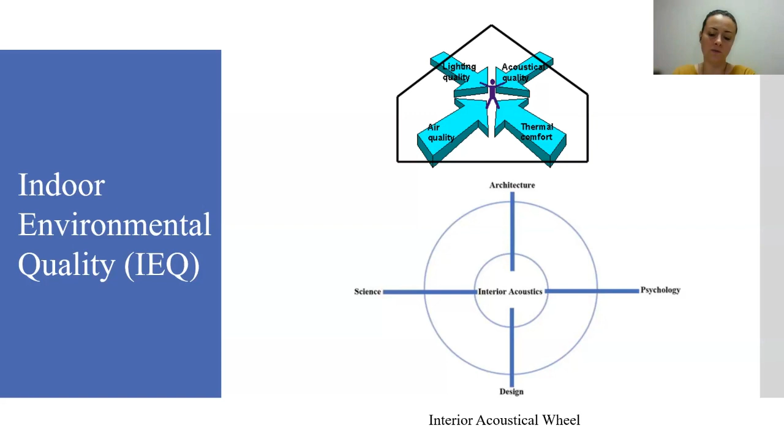And the acoustic quality, which is really important, but generally it's treated like the less important part of indoor environmental quality, but it's not actually. So in the acoustic wheel, interior acoustics deals with architecture, psychology, science, and design, because your design affects the acoustic comfort of a space, which affects the psychology of your users. So you need to know how the sound behaves in a room.

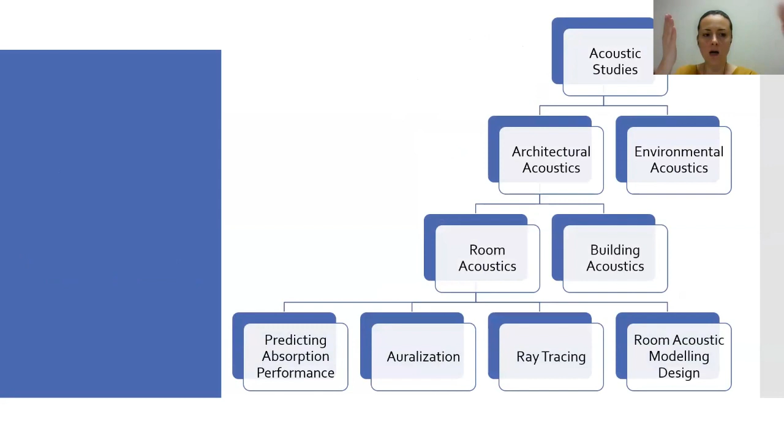So acoustic studies generally divide into two: architectural acoustics and environmental acoustics. Since we are architects and interior architects, we deal with architectural acoustics. And like 99.9% of the studies are room acoustic and building acoustic studies.

When we say room acoustics, it's mostly the volumetric acoustics we deal with. This is the part interior architects deal with more, because when you're trying to increase comfort parameters, you need to know the room acoustics. When we say building acoustics, it's more like the urban noises, or the building's whole sounds. If you're working with the whole building sounds or the building and urban relationship, then you need to work with building acoustics. At the bottom you can see four different techniques.

Okay, we do those studies, but how do we do them? There are some methods. The first, the most used one, is auralization and ray tracing. Those are the more popular ones. And of course, room acoustic modeling design is also popular these days because we have some software, and predicting absorption performance of the space is also becoming popular. But generally, we are doing ray tracing methods in buildings. I will briefly explain what they are to you.

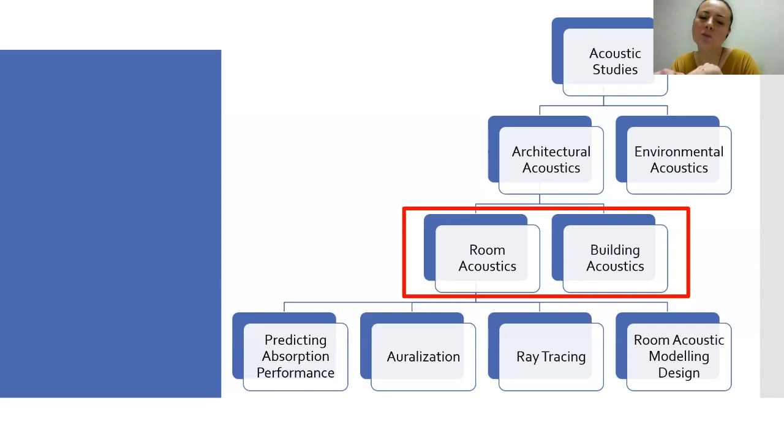Predicting absorption performance of spaces is mostly a method we do in laboratories, where we have special rooms called reverberation rooms, and we can predict how a material behaves in a room, how it absorbs sound. Also in Izmir there's one laboratory like that. If you had taken my course, you would see that laboratory. Room acoustic modeling design is more like, as I said, Odeon, which you will see in some images.

So when we say architectural acoustics, it's the science of noise control within buildings. It includes room acoustics and building acoustics, as I said. The first application of architectural acoustics was in the design of opera houses, then concert halls. First, everything started with analyzing opera houses, spaces for music, and then spaces for communication also. They thought, oh, this is important too, and many studies started to happen in those spaces.

More widely, noise suppression is critical in the design of multi-unit dwellings and business premises that generate significant noise. If you want to study in that field, you can study concert halls, auditoriums, churches, conference rooms, theaters, cinemas, music rooms—any space that a human being can live in, can be in. So you need to think about their aural comfort, like office spaces, your classroom, your home, anywhere that you communicate with someone and there's a space.

So room acoustics is the science of controlling a room's surfaces based on sound absorption and reflection. This is important because, as I said, we deal with sound, and the sound can be absorbed in some spaces and reflected in other spaces. For example, my desk here, probably all of your desks are plywood or some wood with a covering on it, right? It can be shiny or massive wood, whatever, but if it's shiny, we can say it's nicely reflective—or a mirror.

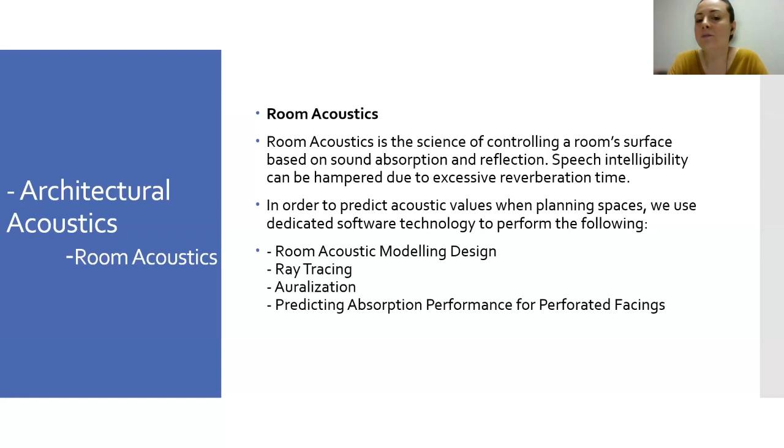There are some parameters I don't want to mention all of them here, but for example, reverberation time - what will be the reverberation time of this space. In those models, we can predict them.

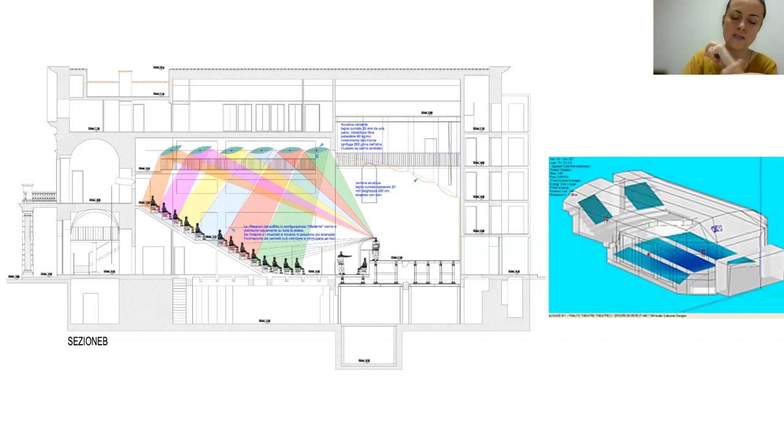On the left-hand side, you can see the ray tracing method. Here there's a speaker on the stage and audiences. With ray tracing, you draw some rays coming out of the mouth and reaching the receivers. You can see how the reflectors on top of the audiences behave.

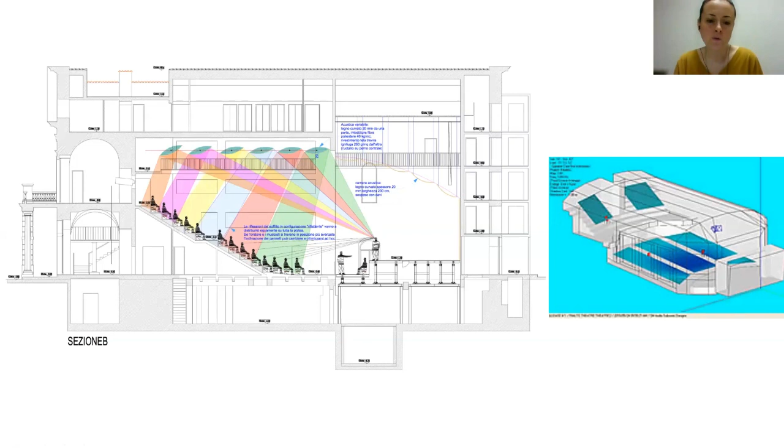If they are reflective, you can see which ray is coming to which part of the audience. For example, when we look at the green part, you can see the first reflector is working for the first 4 rows in that hall. If you tilt the first reflector, you can see that the reflection would go to different parts. So the location and angle of each surface material is very important for us.

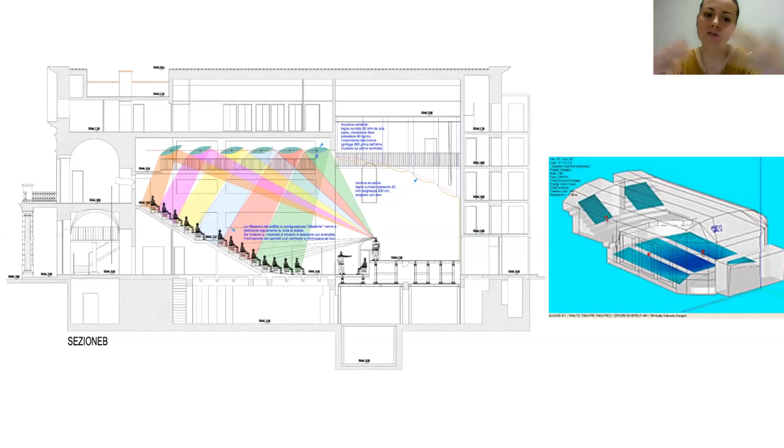This is just an example from a ceiling, but you need to think about the rear walls and the side walls too.

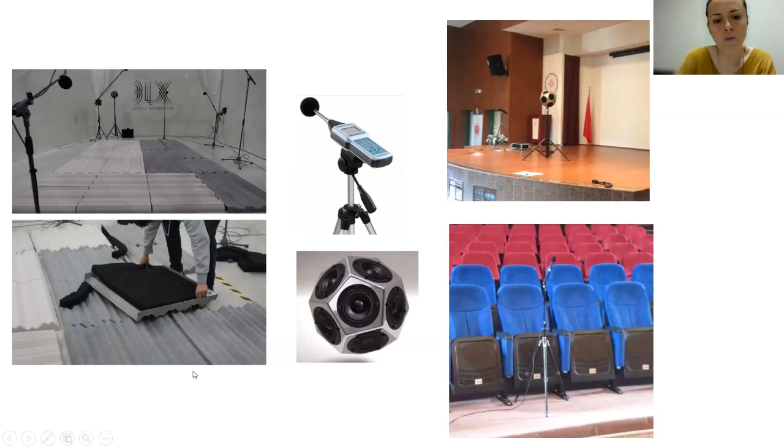So this is the method that we do. And on the right-hand side, you can see those are the auralizations.

So in a space - these are also my images - you can see we locate the speaker on the stage, we give sound to the room, and we auralize what would happen in that space. We have a microphone at the bottom image you will see. You locate the microphone in different settings, and you can see how that person hears each frequency.

So when we say noise control, it's more dealing with controlling the space that the noise is emerged. You need to eliminate the noise source at the beginning, first of all. Then, if you can't, you need to switch it with a quieter one. For example, you're living in a building and there's a huge UPS.

Machine right next to your door, think of it like a generator. First of all, what you need to do is replace that machine if we can, of course, with a quieter one. And then if we can't, we need to know how that sound is produced. We have some different methods in acoustics.

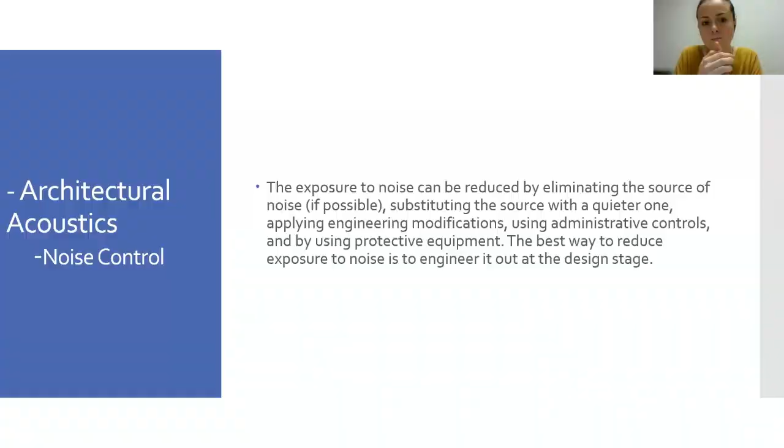For noise, we need to know what is the noise source first, and second, we need to know is it coming from structural borne sound or air borne sound. And for noise control, it's more dealing with urban areas and buildings. First we need to know which sound we can control under noise control. First, if it's industrial noise.

If you're building -- I know there are architects in the studio -- first of all you need to reach the noise map of your location. First of all, you need to know where the main noise sources are around your building. There are some maps you can see, with different colors.

Here you see on the right hand side the CADNA software. In CADNA you can see which building is producing more sound. And for example, if you are constructing a building, you need to know the noisier parts, and locate your volumes according to that.

So you need to know, is there road traffic noise, is it aircraft noise, or is it train noise, is it subway noise? You need to know all of them before starting to design.

And here you can see on the right hand side an image which looks like a huge thermometer. This is our sound recording machine. We carry it everywhere, and we can measure the loudness of spaces, the loudness of an area.

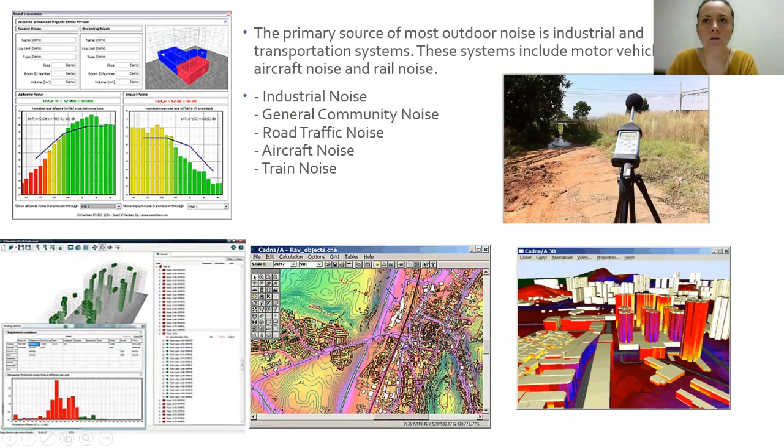And also, I'm sure some of you might have it, with your cell phones you can download some programs, and you can measure the background noise or the loudness level of many spaces.

So with acoustic materials, as I said, both in room acoustics and noise control, you need to know first the noise source, and then you need to know the acoustic materials, you need to be familiar with them. First of all, you need to know which one is reflective, absorptive, or a diffuser, and then you need to know where to locate which one.

So acoustic materials can be absorptive, reflective, or diffuser. I also mentioned a little bit what is absorptive and reflective. Diffuser diffuses the sound in different angles. And the material quality determines whether it's reflective, absorptive, or diffuser. As I said, your tables or most of the walls or glass or mirrors are all reflective.

For a diffuser, it should have different angles on it, you will see some examples. They all have different physical features to control the sound. We need all of them in a space. You cannot just use one of them in a space and reach speech intelligibility.

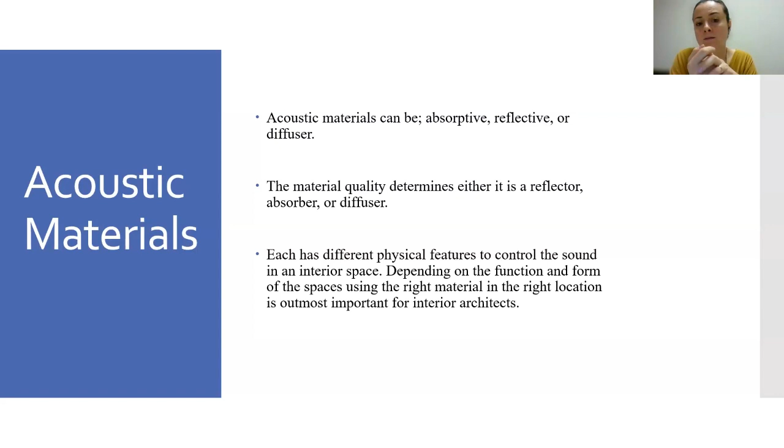You need to know 3 of them and need to know where to use them. Here, the reflector: if you had physics in high school, maybe you studied mirrors. You need to know the reflection. It comes with the same angle and it goes with the same angle. Those 2 angles are the same.

In absorption, let's say you have 100 sound rays. In a reflection, you reflect almost all of them back into the space. In absorption, for example, you say that half of it is absorbed. In diffusion, it diffuses all of them, but in different directions, at different angles.

So reflective materials are located mostly on top of the, not noise source, the speaker. Those are different. When we say noise source, it means that we don't want it, because the main difference between noise and sound is that noise is an unwanted sound. So here the piano is something that you want to hear. So it's a sound, it's a source for us.

Since the sound is generated on the stage, you want to make sure that each person in that auditorium, in that hall, can hear the piano sound at an equal intelligibility level. To reach that, you need to reflect the sound as fast and as much as possible to each seat. So you see different rows of reflectors with different angles, which, in one of the images I showed you, all focus on different locations.

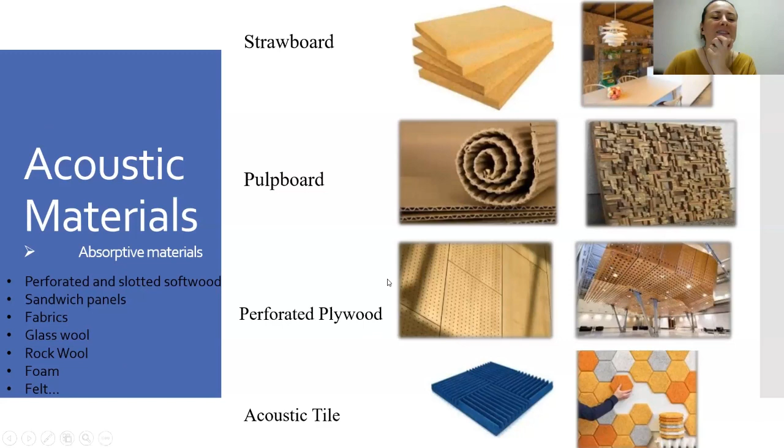And other than that, felt is a very good absorptive material, by the way, or fabrics, like even your clothes, even your body in a space; you become an absorptive material in those spaces. Diffusers, as I said, have different angles, different shapes, which means that the sound ray hits them and diffuses, goes to different angles. First of all, you need to choose one design, and then you can use it in spaces where you want to diffuse the sound.

In order to decide where to use them, you need to have a 3D model in software, like Odeon or different programs. You need to see how the sound would behave, and then you need to locate, okay, let's put some diffusers at that wall. You will see how the sound will behave. If you think that it's too much, you need to decrease the number of diffusers. And of course, to decide, you need to have some quantitative data in front of you.

You need to see, for example, if you put 10 diffuser panels, what happens to the reverberation time? If you put 20, if you put 2, what happens? You need to compare them and select according to that. For example, here are some images that maybe we can discuss. We can see some different materials, like on the ceiling in the first image. It's a perforated plywood, by the way.

It has absorptive materials behind it, because when you're in a space and you start to talk, your sound tries to hit a surface to transfer to heat. That's what actually happens. The sound energy transfers to heat energy as the sound travels. Generally, according to the direction of your mouth, the sound goes to the ceiling, hits the ceiling, and then reflects back. Whether it reflects back or is absorbed, it then reaches the receivers. This is an indirect path of sound.

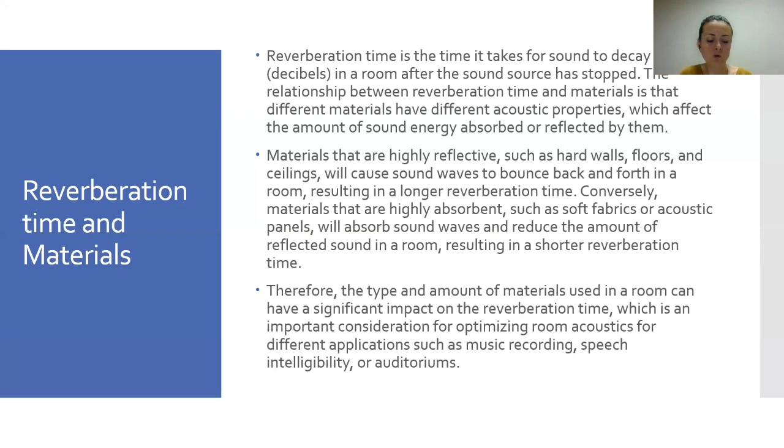So, reverberation time and materials, because in my presentation I'm sure I have mentioned reverberation time many times. I want to explain what reverberation time is with two slides, and maybe you can understand what I'm talking about when I say it. As you know, materials can be reflective, absorptive, or diffusers. So in order to use them, you need to know the reverberation time of a space. And by knowing the reverberation time, you need to know which material to use, and how much of it on which walls, on which parts of the space.

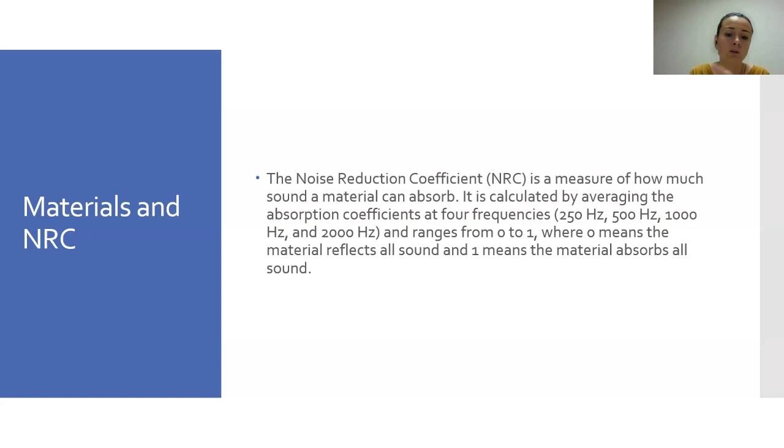If the carpet is fluffy, like 3 or 4 centimeters, daha böyle pamuksu, kalın, it can behave as an absorptive material in a space. But if it's just a very flat, thin carpet, it behaves as a reflective material in a space.

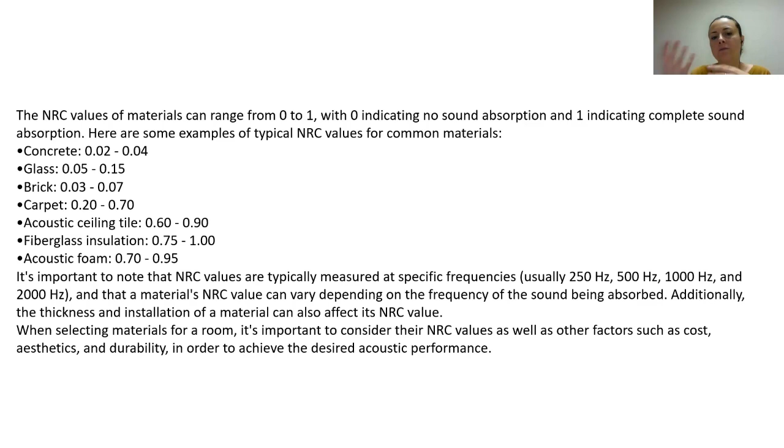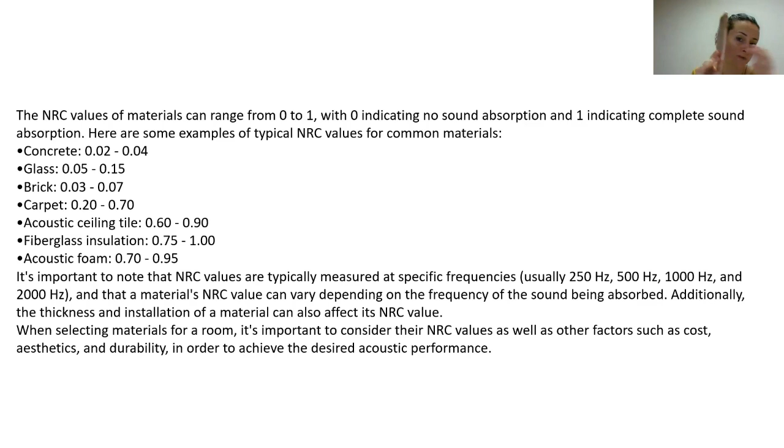For that value, as I mentioned, there are different frequencies in sound. In laboratories, they send different sounds to the material. For example, here is a piece of carpet, and I'm taking a measurement on it. First, I send 250 hertz to that material. Then we send 500 hertz, then 1000, 2000. And then they take an average of it. Here are the averages of 250, 500, 1000 and 2000 hertz.

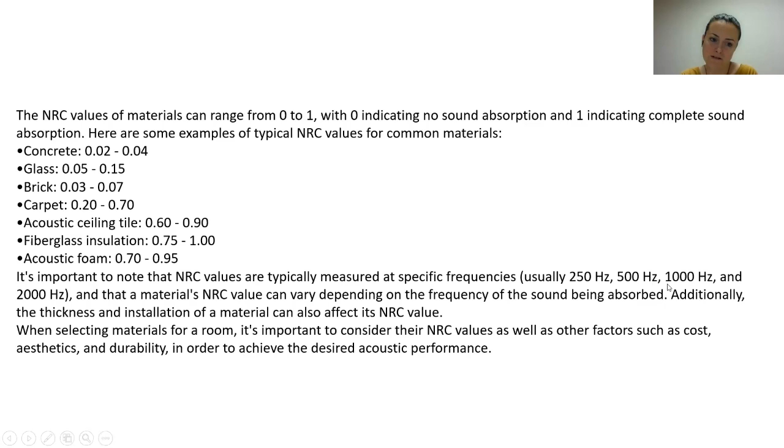So again, we are coming back to reverberation time. Do you remember I mentioned the Turkish bath, Türk hamamı, where your sound would reflect back a lot and have an echo in that space? Türk hamamında ses geri geliyordu. So in that space, we can say the reverberation time is high. But when you're in your bed covered with a blanket, and you shout or clap your hands, since the reverberation time is low, your sound would decay faster.

But in a Turkish bath, for example, you clap your hands or start to sing, your sound would hit a surface but couldn't transfer its energy to heat. It would be reflected to another surface, and from that surface to the ceiling, maybe from the floor, from the ceiling. It would go like that. In your living room or bedroom, it will maybe bounce 2 or 3 times. But in a Turkish bath, maybe just one sound ray will bounce like 100 times.

We don't know. It depends on the volume of your clapping, whatever. So for reverberation time, we define it with RT60, RT60 here you see. So think that you open a source in a space, you open the radio. Okay, actually we use white noise, but I want to make it easier for you. You open the source, you are listening to a sound. It reaches, let's say, 100 decibels.

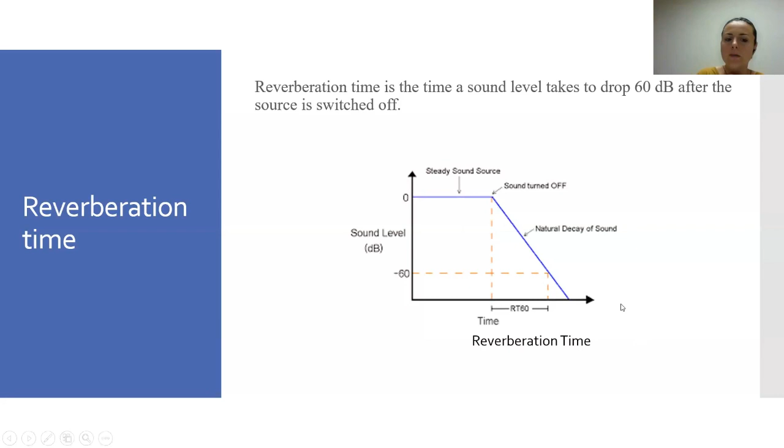Here in that graphic, you can see it also. This is important. I'm mentioning it a lot because I will use it a lot. So the reverberation times, as I said, differ for different spaces. If you're designing a space for speech, you need to have a lower reverberation time, because think that you're trying to give a lecture in a Turkish bath. It would be very difficult. There will be a lot of echo and people wouldn't understand you.

But in spaces for music, we can have higher reverberation times, like 2.5 seconds or even 3 seconds, which means that if you clap your hand in a space for music, the sound would reflect off different surfaces for 3 seconds, okay? But for speech, since the communication should be very satisfactory and the intelligibility level should be higher in a conference room, the reverberation time would be really low, for example 0.5, which is very good for a classroom.

But there are also some spaces that have both functions, like a school hall. In your school hall, one day Fazıl Say comes and plays the piano, and the second day someone gives a seminar, maybe me. So it should be suitable for two functions, right? So those spaces should be maybe around 1.5 seconds reverberation time. It differs. So here's a nice chart. You can see for speech lower, for music higher, okay?

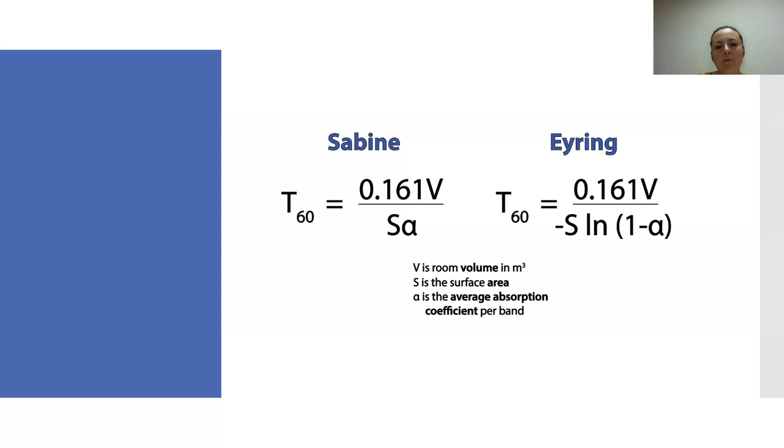So for each space, you can use that formula. Even in your room right now, you can calculate the reverberation time by using the Sabine formula, which is roughly okay. It is very difficult to use it in huge halls, but in small spaces like your rooms it works very nicely. And there's also Eyring, which was developed many years after Sabine. It has a different perspective on reverberation time, but the Sabine formula is the most commonly used one.

So for calculating the reverberation time, in that slide you see the constant times volume divided by S alpha. For that S alpha, this is how we calculate it. For example, in your space, you have 4 walls, a ceiling and a floor, and you are using different materials. First of all, you need to know the NRC value of those materials. In Google, you can type NRC value of concrete. You can see it in each frequency.

NRC value of a plywood, like curtains, carpets, or NRC value of wall constructions, like the wall layers, you can find them for each frequency, as I said. You need to know, first of all, the finishing materials' NRC values. And then if you put them into that formula, you can calculate your reverberation time.

Here is an example. I'm looking at some. Oh, we are almost there. Okay. I want to do that calculation, Belgin Hocam. Maybe if your students want it, maybe you can give a homework. They can calculate their room's reverberation time, looking at my slide. Yes, why not? Yeah, why not?

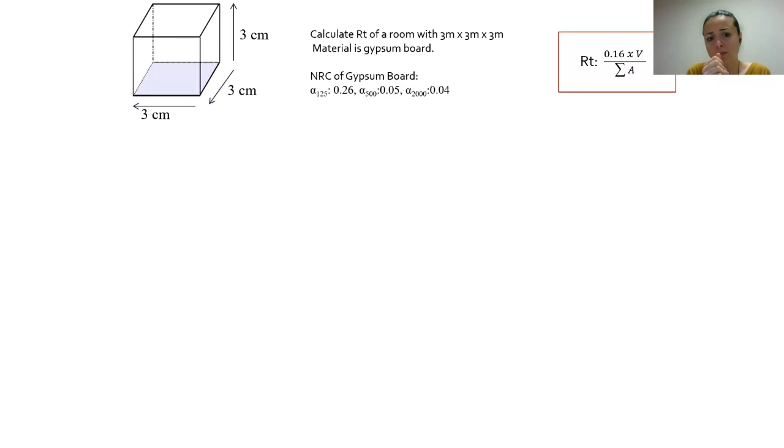So this is a very generic example that I always ask in my courses: think of a space which is 3 meters high, 3 meters wide and deep, which is like a cubicle space, and only one material is used. Think that you're in a space where all the surfaces are gypsum boards. For calculating the reverberation time of the space.

First of all, on that equation, you can see on the top 0.16 times volume. I'm sure you can tell me the volume of the space. En boy yükseklik, which is 27, right? Which is 0.16 times 27. Okay, I can calculate that. But what happens? The toplam A, the sum of A. On my slide, you could have seen the surface area times absorption coefficient of that space. We will do that together, don't worry.

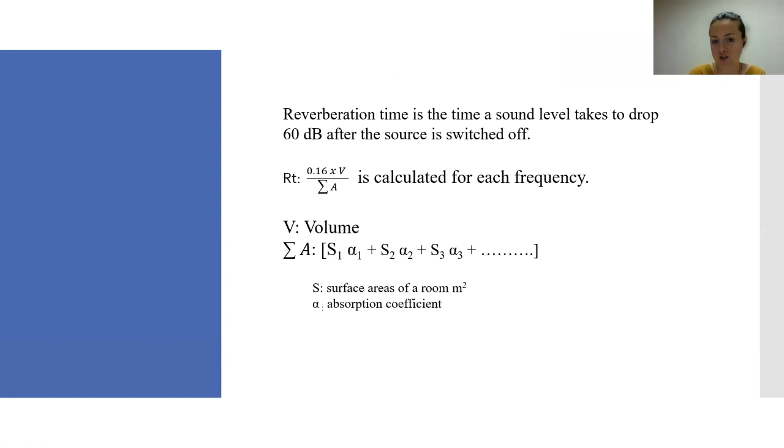So for each surface, you need to know the square meters of that surface and then the absorption coefficient of that finishing material. In my example, which is really simple, at each surface we are using just one material. I generally draw a chart like this. In that cubicle space, how many surfaces do I have? I have 4 walls, 1 ceiling, and a floor, right? 6 surfaces. And they're all 9 square meters each, and the volume is 27, sorry.

And for each wall, when I know the square meters of the wall, I know the alpha value of the gypsum board, right? For example, for wall 1, for each frequency I know the alpha value. For 125, it is 0.26. So I multiply it with the square meters. For 500 hertz, the alpha value is 0.05, and I multiply it with 9 again. At the bottom, we will add them together, don't worry. And for 2000 hertz,

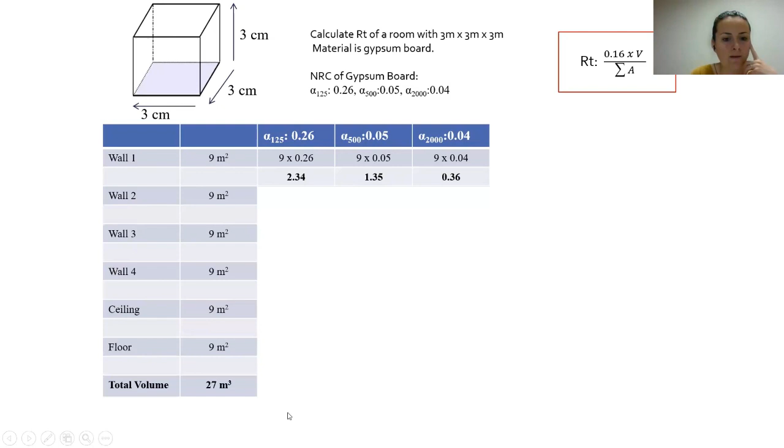For bass sounds, we will have a reverberation time. For the mid sounds, another reverberation time. And for the high sounds, another. If you do that math, for each wall you need to know the area and the alpha value of the material, and then you can have this calculation. For bass sounds, lower frequencies, the first column here, the A value, A değerimiz, is 14.04. For the mid frequencies, 8.1, for higher frequencies, 2.16.

So when I put the values into the calculation, I can find the reverberation time for each frequency, which means that in that space, the reverberation of the bass sound is 0.3. But for the higher frequencies, it becomes 2 seconds. For the lower frequencies, it's 0.3 seconds. What is the difference between 0.3 second reverberation time and 2 second reverberation time? Anyone want to comment on it? In one it's 0.3, the other is 2.

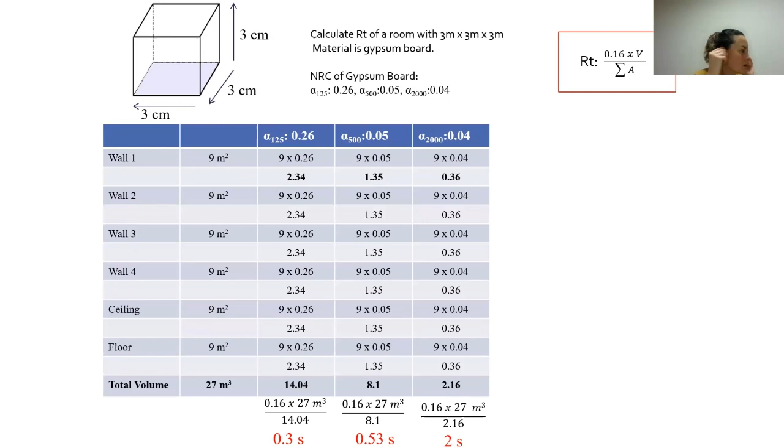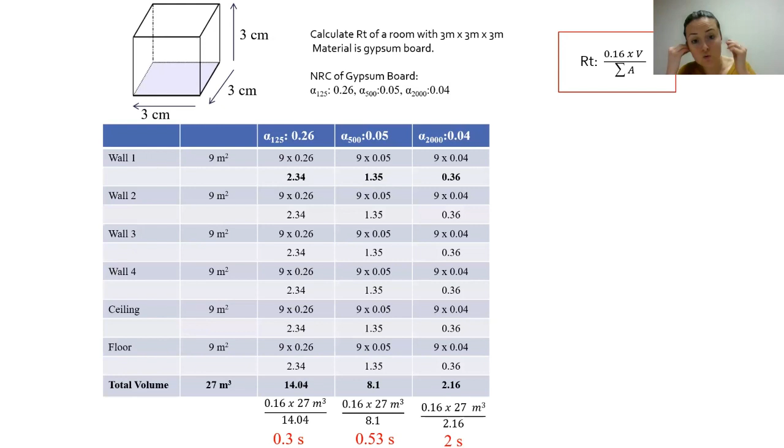For higher frequencies, it takes two. We can add this acoustic calculation to your final assignment, I think that'll be nice. Since we don't have artificial lighting and tools to measure daylighting, we can't add that, but why not add the acoustics calculation at least? You can ask similar PMV, PPD questions for acoustics, but we won't include anything else. I will call Zeynep Hoca - if she's done, we will cut; if not, we will continue a few more minutes.

Work will be uploaded by Bengi soon. Just calculate the acoustic values of your room or case study for the final submission as well. We will add that for the final, hopefully. We'll go over it next week and then add it. Okay hocam, the word is yours, Zeynep Hocam.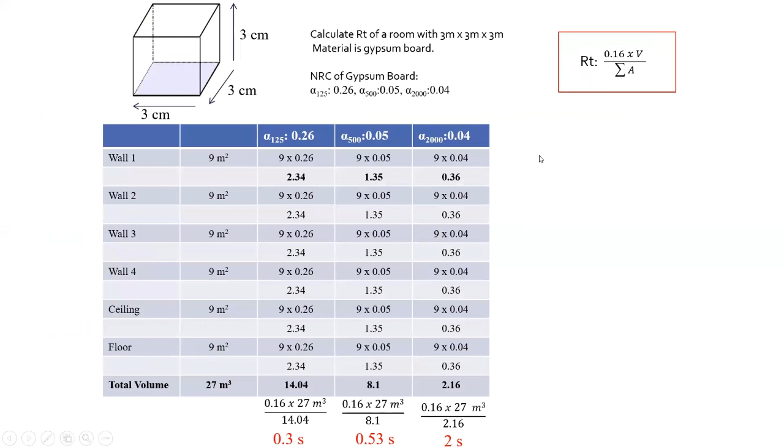So it's better not to have any reverberation - better to have it closer to zero, of course. So that's their understanding, they can interpret the results accordingly. I will lead them for next week. Thank you, you're welcome.

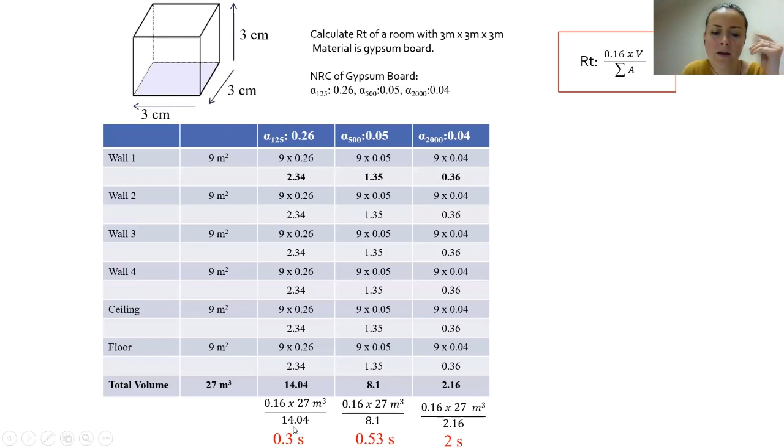For some of the materials, like here, I have three different frequencies. Maybe, hocam, they can have just one frequency. In many of the materials online, they just give like plywood - its NRC value is 0.7, whatever - which means that it's the average. Maybe they can find only one reverberation time, hocam, not three or four like I showed here. It would be easier for them, just one.

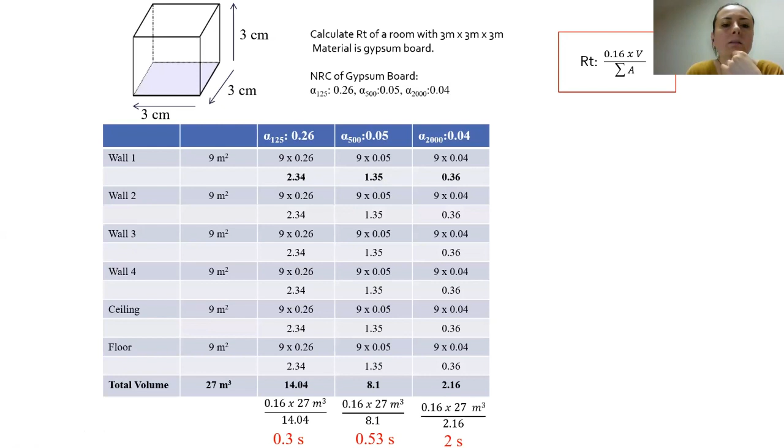They can try one for next week, and if they are interested, they can divide it into the bass sounds, the mid, and the high frequency sounds. Of course they can. Okay, thank you, any questions to Zeynep Hoca?

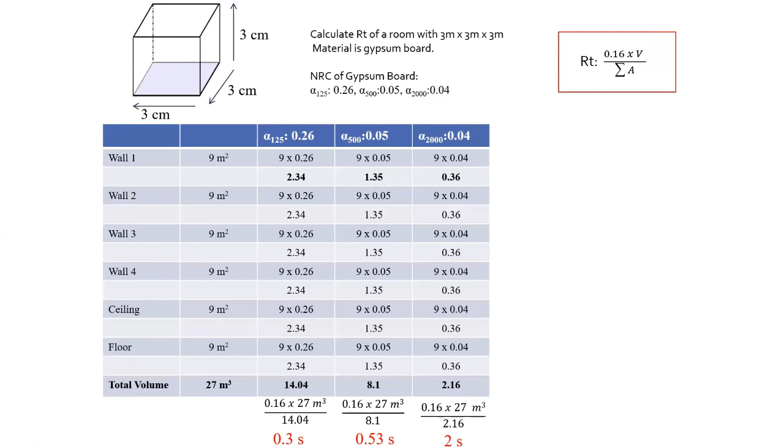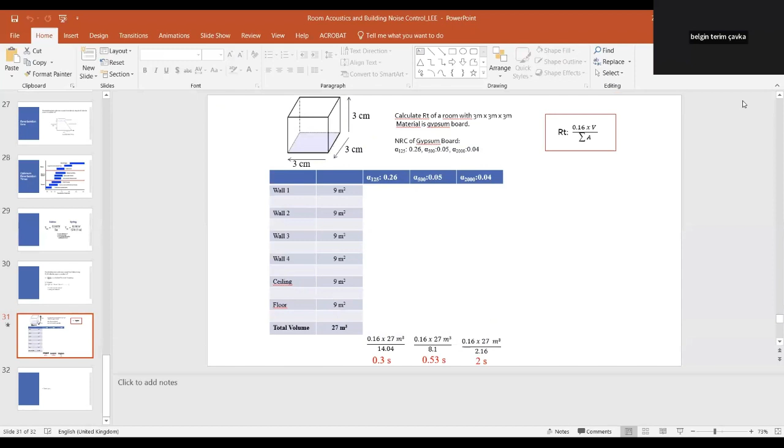Let's take a picture for the seminar. Everybody, please turn on your cameras. Come, yes, Zeynep, next to her is good. One student has a missing camera, so they are in class together, which is lucky. Good to see them. Do you see me by any chance? Am I there? Okay. I don't see myself, I don't know why.

Belgin hocam, I gave two readings, one of them is from Porto. I didn't realize that. One of the readings is like the museums, there are two of them. I will recheck that, thank you for your guidance - that's why I chose it, by the way.

Yes, we are taking the picture. Okay, one more.